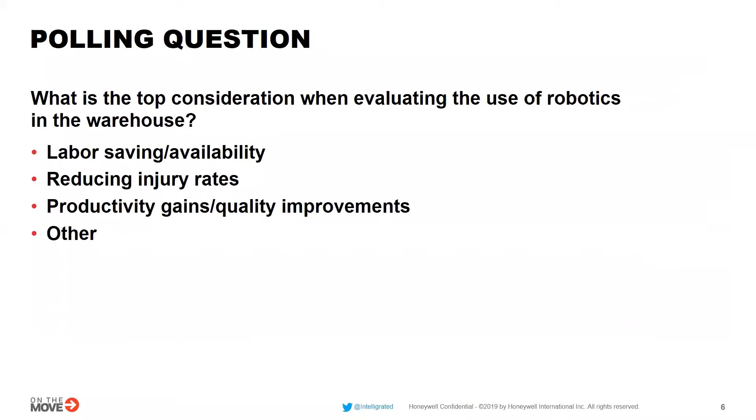So let's get into our first polling question. So when you're considering the use of robotics in the warehouse, what are your focuses? Are you focusing on the labor savings and labor availability, reducing the amount of injury rates, productivity gains, quality improvement, or some other factors? So most likely you're focused on a lot of these things, but looking at, well, what's the top driver here for this? So you should be seeing a pop-up on your screen that allows you to respond to this poll.

So while you're filling that out, I'm going to talk about, so why robots in the warehouse and why now? So we've seen robots out there for many years, 25 plus years. Robots have been doing work in manufacturing space. It's a very structured environment. Things like in the automotive industry, there are robots doing work all the time, but you haven't seen that primarily in logistics.

Well, one of the reasons is because robots are very good at doing things very repetitively over and over again, but have historically been not particularly great at doing things that are very unstructured and more chaotic. And really, that's what the warehouse is. It's a very chaotic environment, lots of different shapes and sizes and configurations of the products, and lots of different configurations of where things are located in the facilities as well.

So we're seeing a trend that the technology is actually enabling robots to thrive in this more unstructured environment, which is the warehouse and fulfillment operation. They're able to do this through things like vision systems, sensor technology, grasping technology. Mobility is a key factor here, software and machine learning. So all of these things are allowing robotic solutions to be able to function in the logistics environment like they've never been able to do before.

So can we see the results from the polling question? Okay, so we're evenly split here between labor savings, availability, and productivity gain. So they're head-to-head, maybe just slightly favoring the labor savings and the availability. So it sounds like a lot of our audience has the same kind of challenges that I articulated just a little while ago. They're having struggles just finding the labor to do the work that they need to get done. Okay.

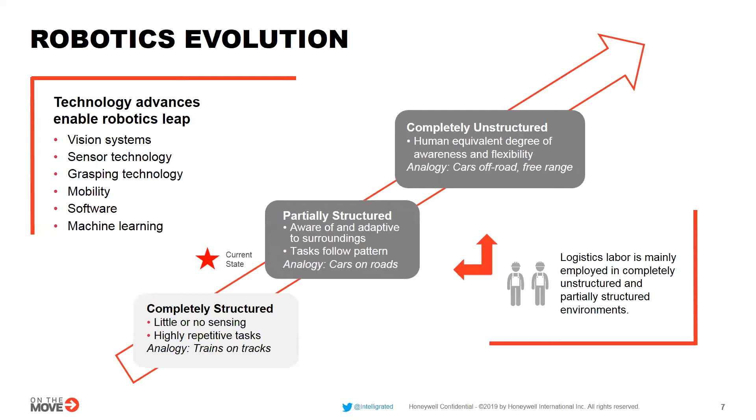All right. So let's bring in mobile robotics, but let's do a little level setting here. So the term mobile robotics is thrown out there quite a bit. So what do we really mean by mobile robotic technology? So we hear the terms mobile robot, AGV, AMR, LGV, a lot of different terms that are used. And they're used somewhat interchangeably. But at the end of the day, these mobile machines consist of essentially a vehicle, a payload that the vehicle is moving around, and some form of guidance system.

So a lot of the technology that we'll talk about today is revolving around what we're calling an AMR. An AMR is essentially one of the more sophisticated types of mobile robots. It uses sensors and onboard navigation to allow the robot to autonomously navigate around obstacles in its environment and be able to interact with that environment. So as things change and are unpredicted, it can react to those environments. So that's primarily what we're calling the AMRs.

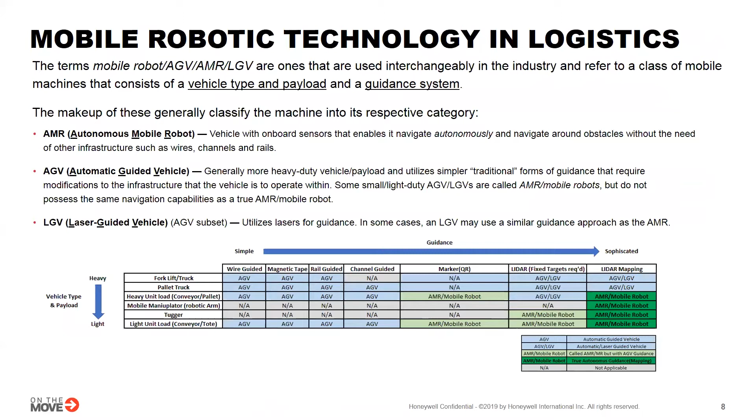AGVs and LGVs are essentially the same type of class. AGVs are generally considered more of a heavy-duty type of mobile unit. Typically, it goes in using infrastructure, adding lasers or adding wires in the floor. That's historically where an AGV has been referenced.

So why mobile robots? So some of the advantages behind mobile robots are they're very cost effective. It's very economical to get started here. Total deployment costs are lower than traditional industrial robotics in many of the applications. In general, little or no infrastructure is required to get some uses out of these robots.

Integration, generally speaking, is you can exist around existing workflows, so you can integrate them into current operations fairly seamlessly. They're scalable, so if you start out maybe with a small pilot program and now you see your business grows, you can add more robots and be able to seamlessly integrate with your operation.

They're adaptable too, as I mentioned before. They've got sensing capabilities and they can sense the environment around them and make the appropriate decisions. And so you don't necessarily have to have a lot of fixed infrastructure, or your infrastructure can change and the robotic solutions can adapt. The last one's improved capability.

So this gets more into the mobile manipulation piece. A lot of fixed articulated arm robots have challenges with regards to reach envelope, which may limit their capabilities and capacity. And so adding mobility to a mobile manipulation solution adds additional functionality that we wouldn't have otherwise in a static solution. So I'll talk about those examples here in a little bit.

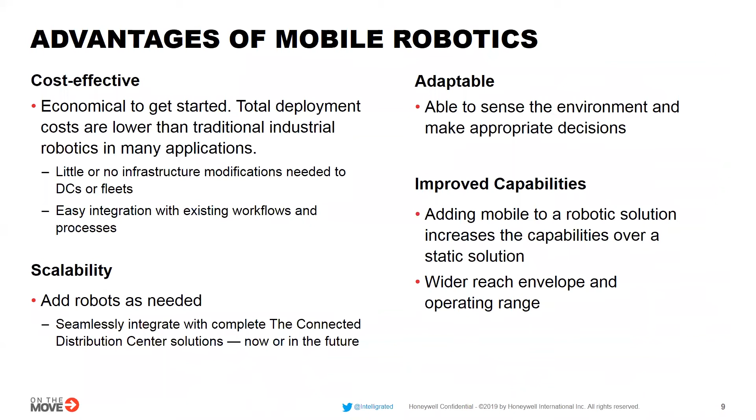So let's talk a little bit about Fetch and Honeywell. We have a strategic relationship with Fetch, and the organizations together combine the robotic integration expertise of Honeywell, as well as our broad product offering, with some of the unique AMR technology that Fetch has to offer. These AMRs can be leveraged anywhere from a very simple integration all the way up to a part of a larger complex integrated system.

And we do all that integration of all of the equipment, whether that be the upper level software, the conveyance and sortation, or the integration of the mobile robotic solution. So we see that Fetch brings a unique solution to the table. With that said, I want to ask Joe to talk a little bit about Fetch Robotics and some of the use cases for the mobile robotic solutions.

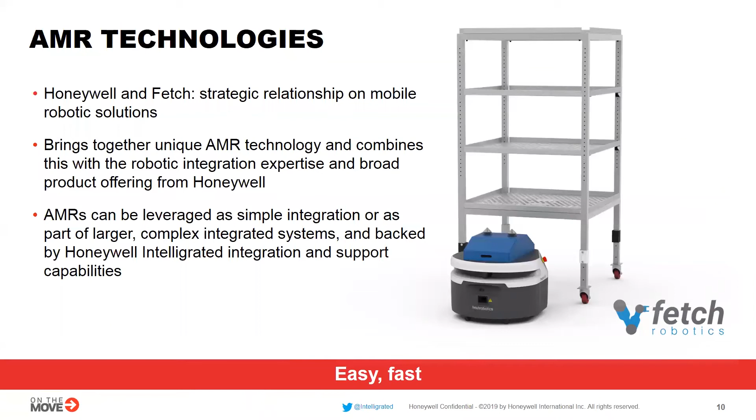Sure, thanks, Matt. Just to give you a little bit of information around Fetch Robotics, we were founded in 2014 and we're based in Silicon Valley. Our organization and our leadership have very deep roots in the development of autonomous mobile robots, and we're also quite involved in the continuing evolution of autonomous mobile robot safety standards and such within the robotics community.

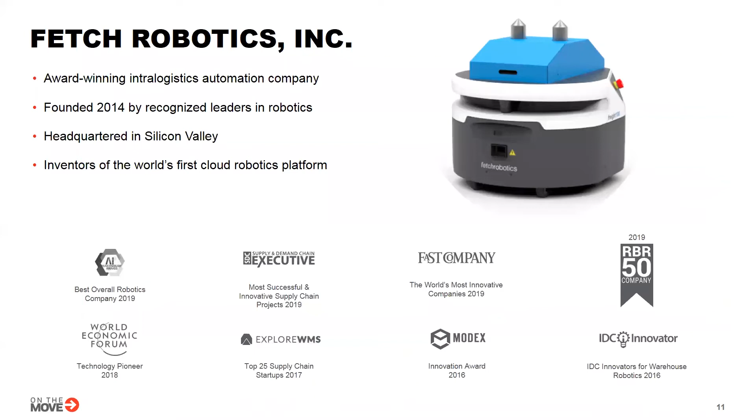The other thing to note here is that we've also moved beyond just thinking of AMRs as disparate units, but really around delivering AMRs and AMR technology as a full solution via a platform that can truly deliver enterprise management, visibility, and support functions as well.

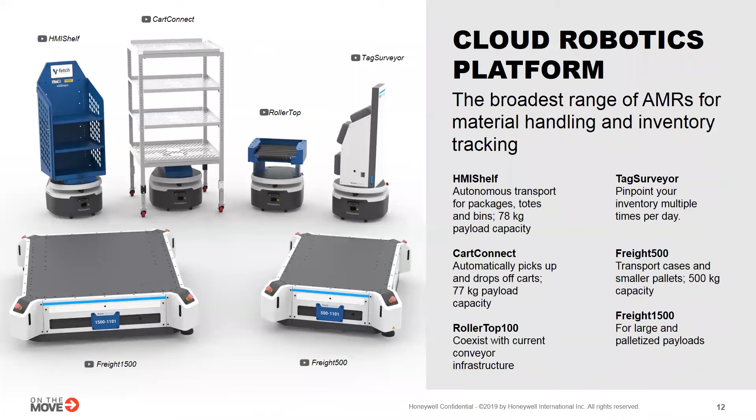And so here you can really see all the different ways and areas that AMRs can be used and really are being used today. Fulfillment and replenishment work is quite common, as I had already noted, but if you're looking at more flexible AMR solutions that are out there, they are really capable of other types of movement around warehousing and also manufacturing. And I think sometimes that manufacturing component gets left out when we talk about autonomous mobile robots.

And the other great thing about this technology is that the workflows themselves can actually be adjusted intraday. So if you have an AMR doing one type of task, say in the morning, it can also be set up to do an entirely different type of task midday or later in the day or on a different shift.

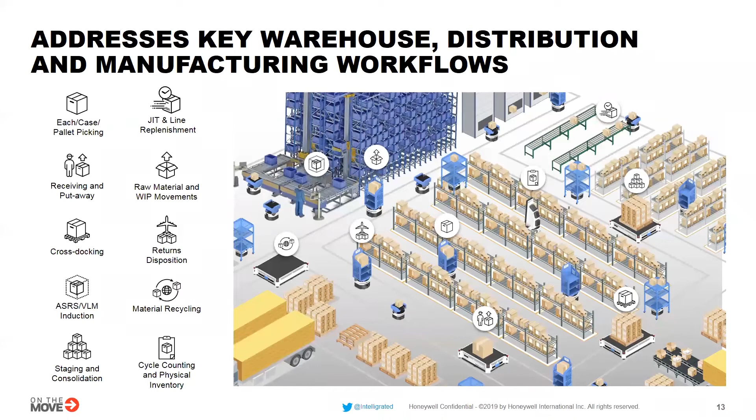So this gives you a little bit of a compartmentalized view around some of the things that AMRs can do. Over on the left-hand side, you see more the general warehouse movements, order fulfillment, replenishment. Those are the things that really fit there. On the manufacturing side, I'd like to break this down into three different sections: pre-line or station, in-line, and end-of-the-line movements. And so before reaching any sort of manufacturing line or station, you've got kitting and consolidation movements.

Intra-line or at the stations, you have replenishment of non-inventoried items, things like screws and labels, and at the end of the line for manufacturing, you've got movement basically into finished goods inventory or into an RMA or QA area, or straight to pack out or shipping.

And then the third category there around inventory management, I'd really like to talk about it more in terms of asset management, because it not only applies to inventory, but also the tracking of assets. As an example, if you're using reusable packaging.

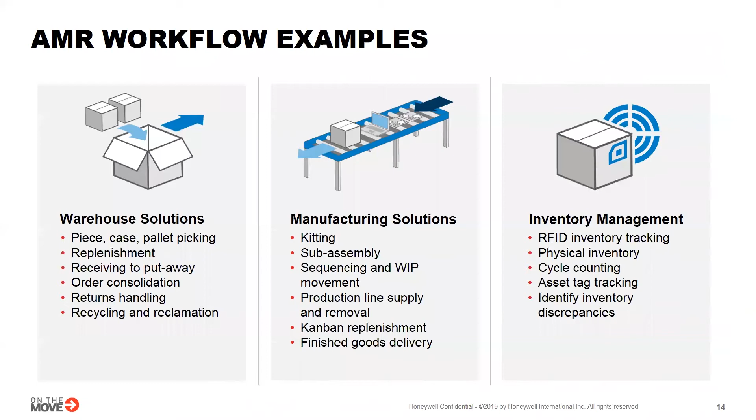But essentially what we've been able to do on the RFID side, if you do have RFID technology deployed, is that AMRs can be enabled to do tracking tasks like inventory location checks or inventory cycle counting autonomously. Anyone with any sort of broader and long-term focus around flexible automation should be considering this platform-based approach to deploying AMR technology.

Slide. So case study. This is a case where AMRs were performing a fulfillment workflow in a very mixed inventory environment. Essentially, the AMRs were used to move picked product from a consolidation area to an ASRS induction area. And it was absolutely a mission-critical workflow for the distributor. And you can see the significant productivity improvements that they were able to report back to us, ROI in less than 1 year.

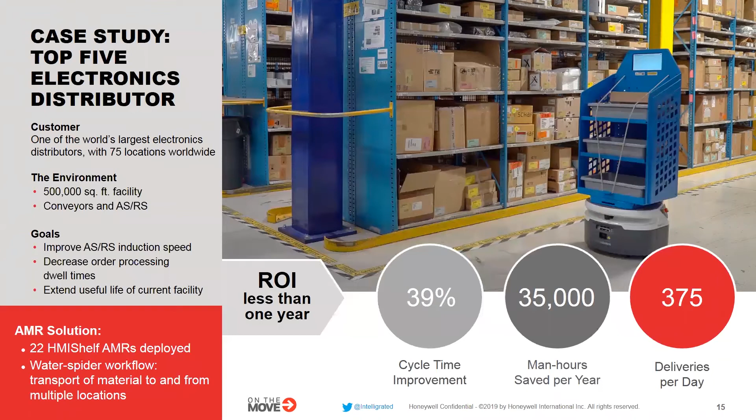Next example. Here we have a GPS technology provider. And in this case, the AMRs were used in a manufacturing environment to deliver kitted parts to manufacturing lines. The big benefit here was the redeployment of staff onto the lines themselves and reduction, in some cases the elimination, of any sort of overtime pay.

But it really does speak to some of the things that Matt already touched on around the shortage of labor, the ability to redeploy labor into higher value tasks, and the ability to automate some of those tasks that they're currently performing that are quite repetitive.

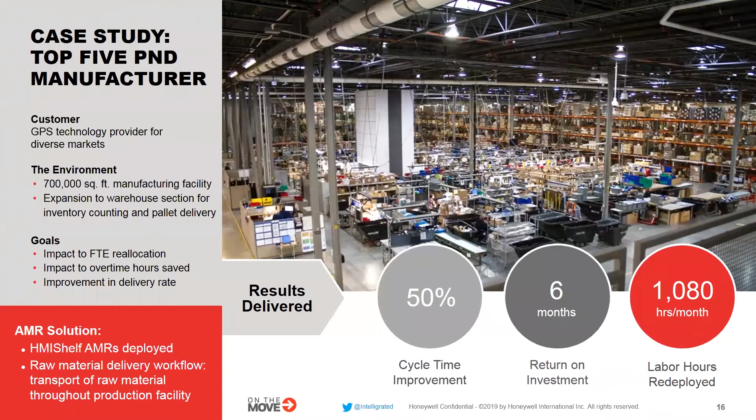Yeah, so this is an example of an integrated workflow solution similar to the one you just talked about there, Joe. This is a manufacturing environment where it is an assembly line that we're manufacturing components off of. In the current operations, those manufactured goods are pooled at the end of that line, and then there's additional work that happens within that facility. And so those individuals have to take that and drop it off at other production lines, whether it's the green line, the blue line, or the purple line. And these may be located in a wide space inside of the facility.

So it takes, one, the knowledge to know where those items are to be routed, and two, it takes time to get those items there. So there's twofold inefficiencies. And so in this particular example, we've leveraged our routing software and integrated with the shelf-based AMR to be able to route the finished goods appropriately to the next stage in the manufacturing, improving the quality for that delivery, as well as allowing the people to stay in that work cell and continue to manufacture those finished goods, and improving the overall productivity.

So this is another example of integrated workflow operation. In this example, we have a person doing voice picking. That person's generally picking to carts. And so the voice solution is directing which items to pick and what location to go pick from. They're staged in a particular area doing that operation. Once those orders have been picked, they have to take those orders and go deliver them to some other location within the facility, taking away that productivity time to transport the products over to a different location in the warehouse.

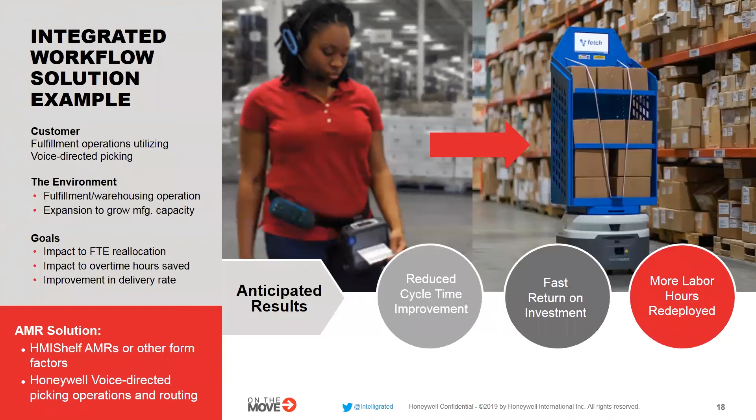So another polling question. If you were to consider using AMR technology, where would you use it? In the order fulfillment operation, so actually doing the fulfillment, kitting and assembly, some of the examples we talked about, data collection, some of the items that Joe mentioned, or was there something else, some other places that you'd like to leverage material handling AMR technology?

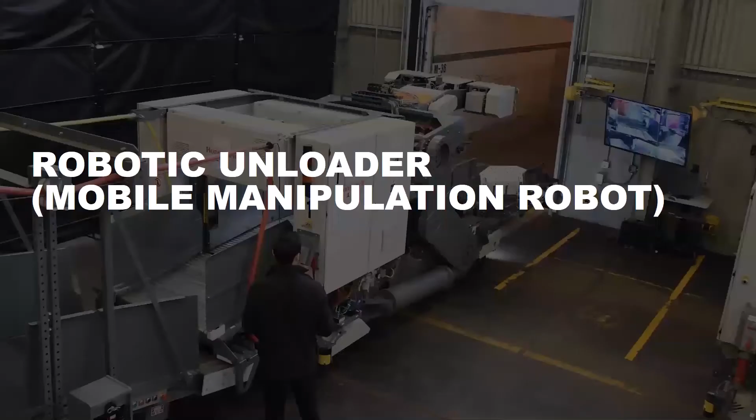So while that polling question is being added, I'm going to talk about something different. So this is a mobile manipulator. This is a robotic truck unloader. This is a robotic system that we developed to autonomously unload tractor trailers or containers of floor-loaded products.

It's to address a lot of the same labor challenges that we talked about before with the AMRs, where we want to get the individuals out of a dirty and dangerous and dull environment, and we want to put them in charge of robots to still improve the productivity of the overall operations, but to leverage that valuable resource of that operator.

So like I said, this is the inside of a trailer. If you think about it, in the middle of Phoenix, Arizona, in the middle of the summer, it is an extremely hot environment. It's very dangerous to be in there for an extended period of time. Lots of breaks.

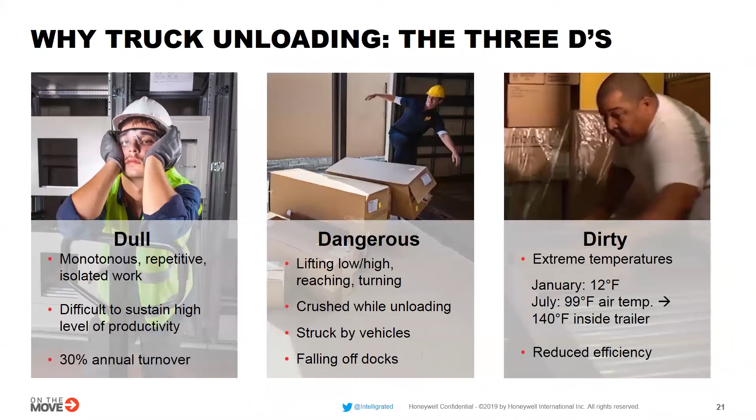And so we want to be able to get those people out of those trailers, put these types of equipment in, and have the people that we're removing from the trailer run these machines, so that we increase the overall job satisfaction, we increase the overall retention of those individuals, and we reduce the amount of injuries that they have.

So mobility. Mobility is really an enabler to this solution. If you think about an articulated arm, it's not going to be able to get the entire truck. So you have to have some way of getting all the way into a 53-foot truck. And so putting a manipulation system on top of a vehicle allows you to extend that application well beyond what you could do with a fixed articulated arm.

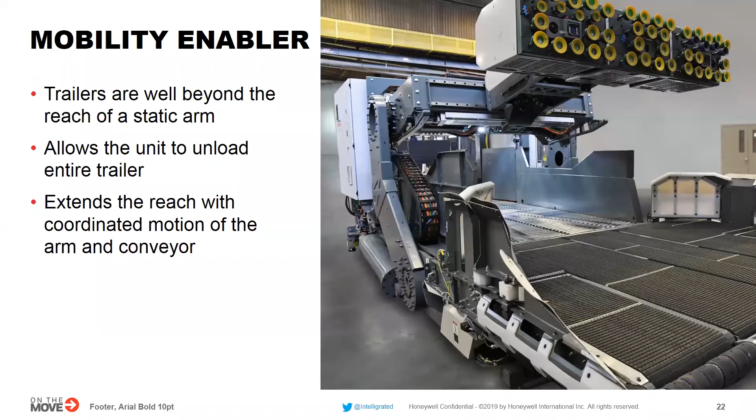Like I said, obviously it allows you to unload the entire trailer. In addition to that, above and beyond just getting it there, it does extend the reach envelope of the robotic arm that is doing the operation. So as the machine is actually doing its operation, and I'll go ahead and show you a video of this, we can move in and out of the trailer.

There we go. Maybe I can get this to play. So I'll continue on here.

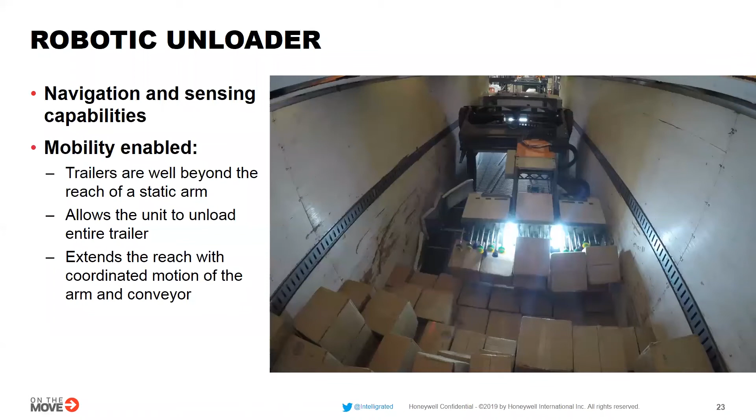So it allows us to go in and out of the trailer and reach further in, so that articulated arm can reach deeper inside of that truck to pick products further up and further away from it than if we just remain static. So it really is an enabler to what we're able to do otherwise.

So let's get into some considerations that we have for deploying robots. This goes for the mobile manipulator as well as AMRs in general, but also overlaps to articulated arms. We have to recognize that much of the data for these applications really doesn't exist. In the case of an AMR, there's a mapping process that needs to take place to allow the robot to understand its environment and set up what the different areas are within the facility.

In the case of the truck unloaders, the distribution of the weights and shapes and sizes aren't really, generally speaking, known to any great level of specificity. And so when deploying these applications, there is additional information that is needed to enable the robotic solution.